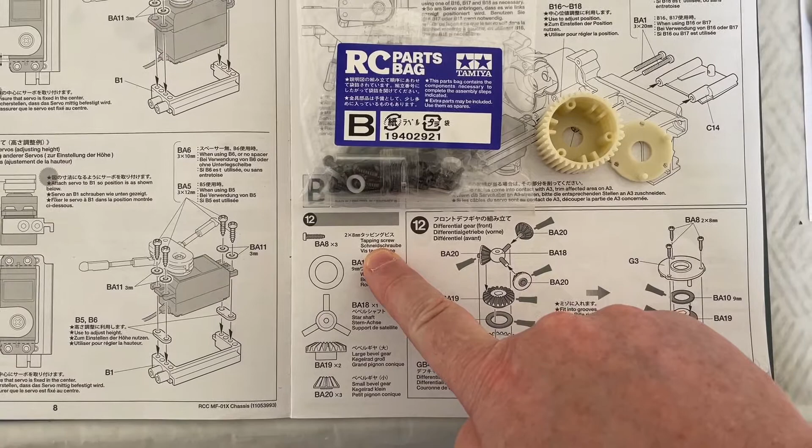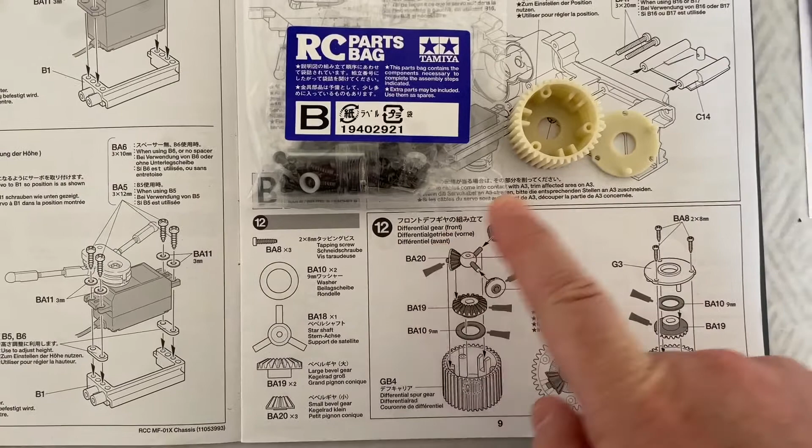Right, so we can now move on to step 12, and step 12 is much the same as step 3, which is the differential that we built. This time we're building it for the front, as you can see here. So I've got the actual differential spur gear and the little cap that you use. We need to open parts bag B because we need to get these components together.

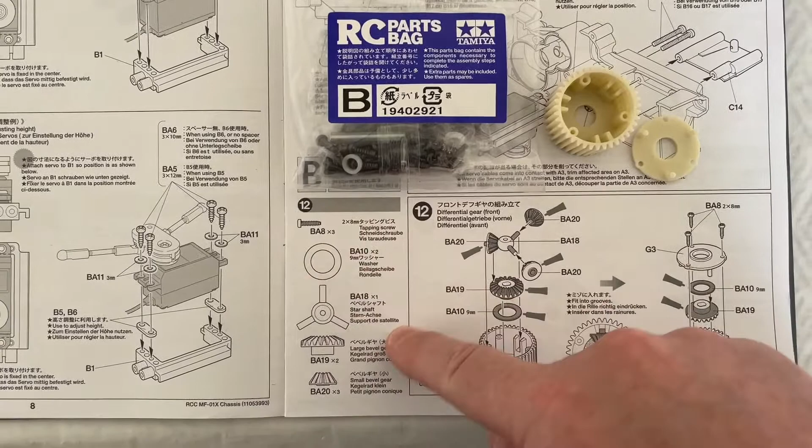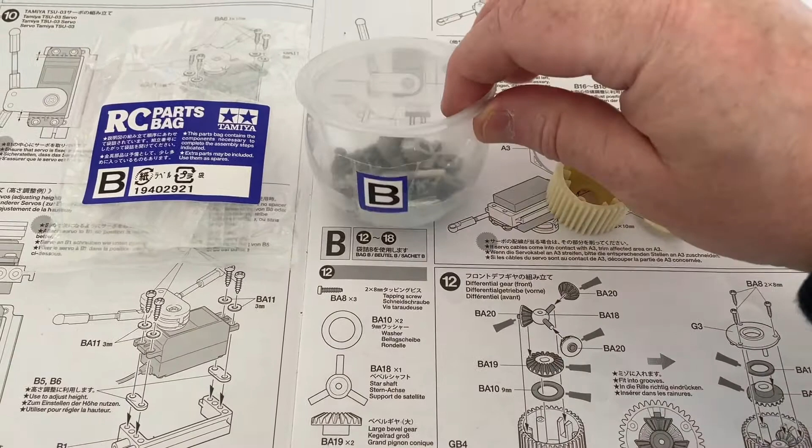Right, for those of you who are new to building with me, what you'll see is that I tend to use things like this yogurt pot and stick the little labels on. So anything that was in bag B, I've emptied into the yogurt pot so we know where everything is. Everything apart from the big items, of course. Yeah, so now let's get the components out and show you what we need to do to build this differential for the front.

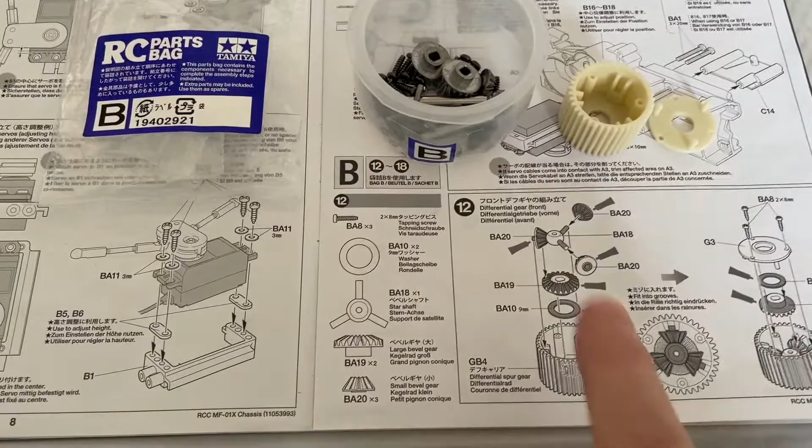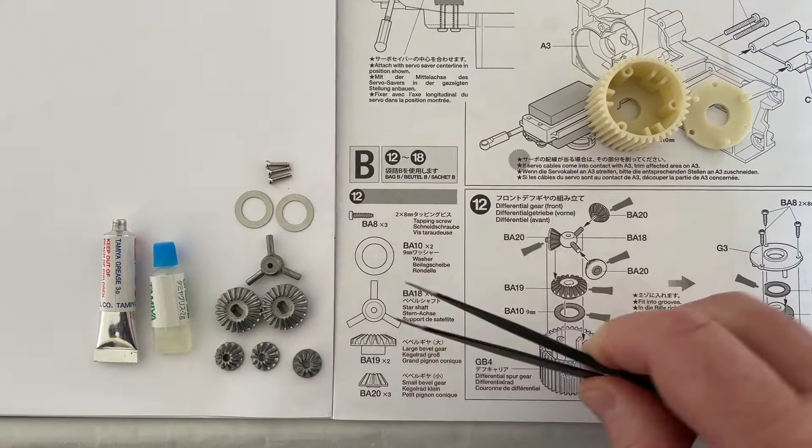Right then, so let's get the components together that we need. We need the BA8s. They're the 2x8mm screws. We need 3 of those. We need these 9mm washers, 2 of those. We need the star shaft, 1 of those. We need the large bevel gear, which is 2 of those. We need the small bevel gear, which is 3 of those.

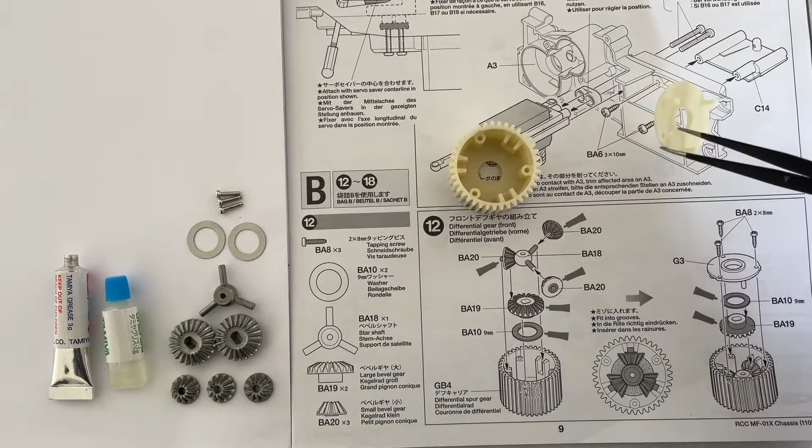We need plenty of grease, and we need our differential spur gear, and we need the G3 component, which is a cap that goes on top. So we now need to build all this together, greasing everything up nicely, just as we did in step 3. So let's put these together.

Righty, let's get started. Let's get some grease in here, because we need to make sure this is greased at the bottom. So we've got nice lubrication along the bottom there, because the washer has got to go in. So putting a bit of grease in the bottom, the washer will now stick, won't it? Because you can go dab and you can pick up the washer. Pop that in so it's in place, and make sure that's also greased on the top section as well. There we go. So that's now in place and greased.

Right, now we need to get our large bevel gear, and we need to put some grease on the underside of this large bevel gear as well. So let's pop some grease on there. There we go. And give that a good smear around. Plenty on. There we go. So now the large bevel gear can go into the bottom of that. You can just wiggle that in place.